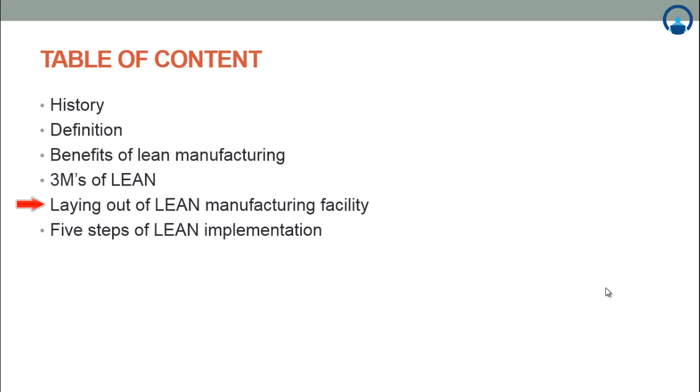Let's start with a brief history of lean manufacturing. Lean manufacturing, or lean production, was first introduced by Womack, Daniel Jones and Daniel Roos in the book The Machine That Changed the World in 1991. The first person to truly integrate the entire production process was Henry Ford. At Highland Park, Michigan in 1913, he married consistently interchangeable parts with standard work and moving conveyance to create what he called flow production. So Henry Ford was the first person to introduce flow production in a manufacturing industry.

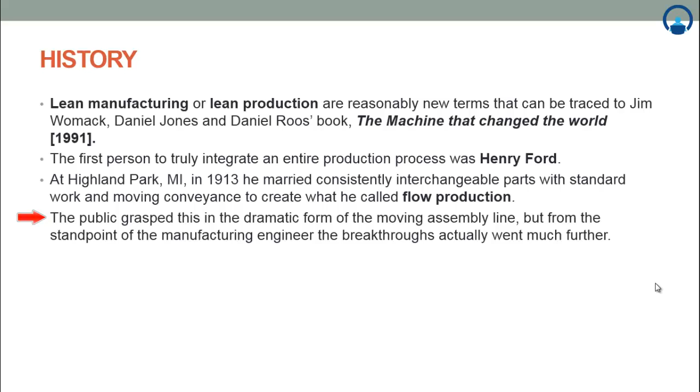The public grasps this dramatic form of moving assembly line, but from the standpoint of an engineer, the breakthrough actually went much further. As Kiichiro Toyoda and Taiichi Ohno and others at Toyota looked at this situation in the 1930s, and more intensely just after World War II, it occurred to them that a series of simple innovations might make it possible to provide both continuity in process flow and a wide variety in product offering. They therefore revisited Ford's original thinking and invented the Toyota Production System, the TPS.

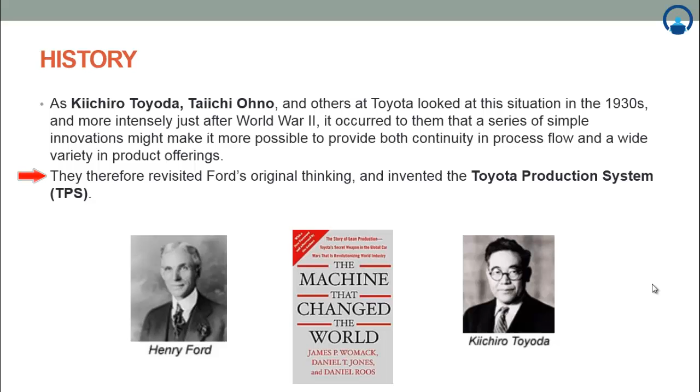So, what is lean manufacturing? Lean manufacturing has been defined in many different ways. One of the definitions given by the MEP Lean Network is: a systematic approach to identifying and eliminating waste through continuous improvement by flowing the product at the pull of the customer in pursuit of perfection.

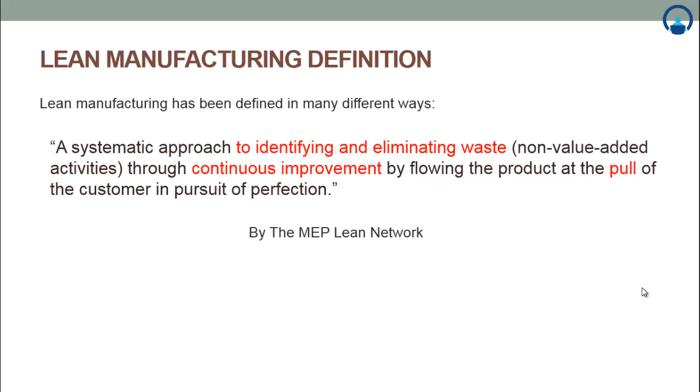I highlighted 3 words: identifying and eliminating waste, which means non-value added activities in the product and process part. The second part I highlighted is continuous improvement, which says that continuous feedback and improvement is needed in the product and process part of a manufacturing industry. The third part I highlighted is the pull part, which defines that customer feedback is important in a lean manufacturing system.

Now, what are the benefits of lean manufacturing? Lean manufacturing delivers an insurmountable competitive advantage over competitors who do not use it effectively. So what are the advantages gained by the industry? The first is lower production cost, directly proportional to higher profit and wages. Indeed, lean manufacturing reduces the production cost and directly increases the profit and wages of a company, as the cost avoidance flows directly to the bottom line of the industry.

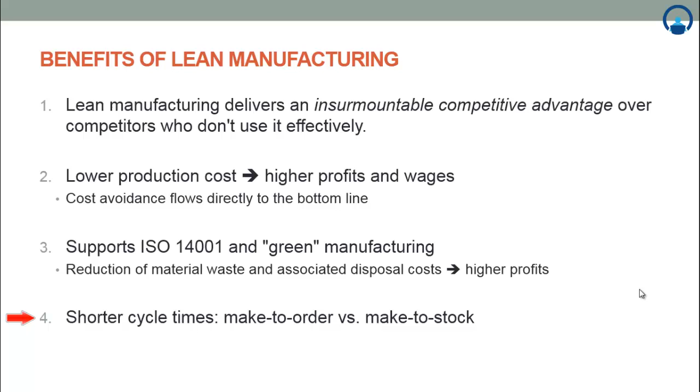Third is that it supports ISO 14001 and green manufacturing. The reduction of material waste and associated disposal cost is directly proportional to higher profits of an industry. Fourth is shorter cycle times, which definitely decreases the cycle time of make-to-order versus make-to-stock.

Now I will cover the 3 M's of a lean manufacturing system. The first M, Muda, the Japanese word for waste. The second M, Mura, the Japanese word for inconsistency. The third M, Muri, the Japanese word for unreasonableness.

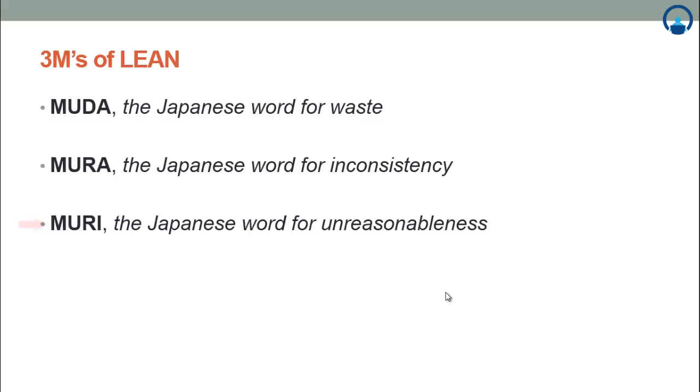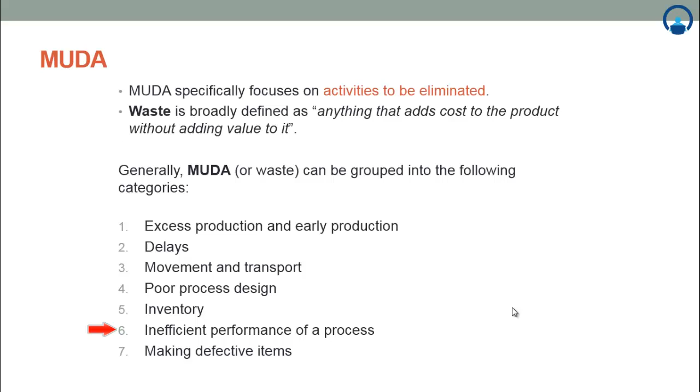Muda specifically focuses on activities to be eliminated. Muda, as defined in Japanese, is waste. Waste is broadly defined as anything that adds cost to the product without adding value to it. Generally, Muda can be grouped into the following categories: excess production, early production, delays, movement and transport, poor process design, inventory, inefficient performance of processes, and making defective items. These are the 7 types of waste, or 7 types of Muda.

The first is correction, repair or rework. Motion: any wasted motion to pick up parts or stack parts, also wasted walking. Overproduction: producing more than is needed before it is needed. Conveyance: wasted effort to transport material, parts or finished goods into or out of storage or between processes. Inventory: maintaining excess inventory of raw materials, parts in process, or finished goods. Processing: doing more work than is necessary. Waiting: any non-work time, waiting for tools, supply parts, etc.

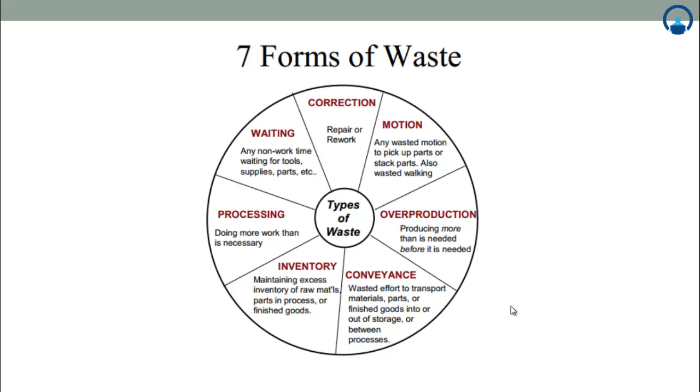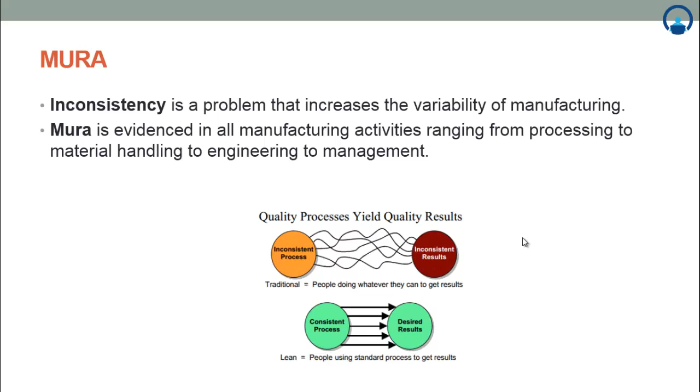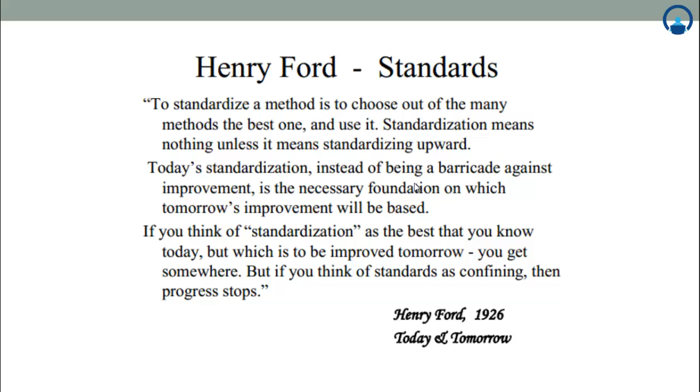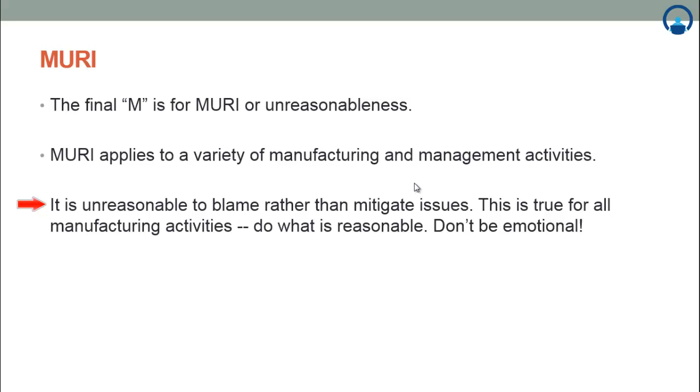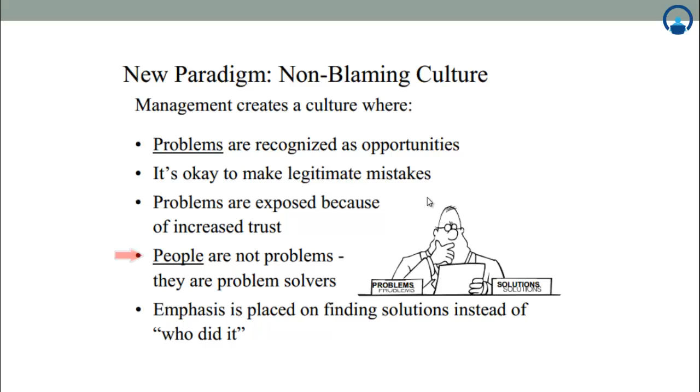This figure shows the new paradigm, a non-blaming culture. Management creates a culture where problems are recognized as opportunities. It's okay to make legitimate mistakes. Problems are exposed because of increased trust. People are not problems, they are problem solvers. Emphasis is placed on finding a solution instead of who did it.

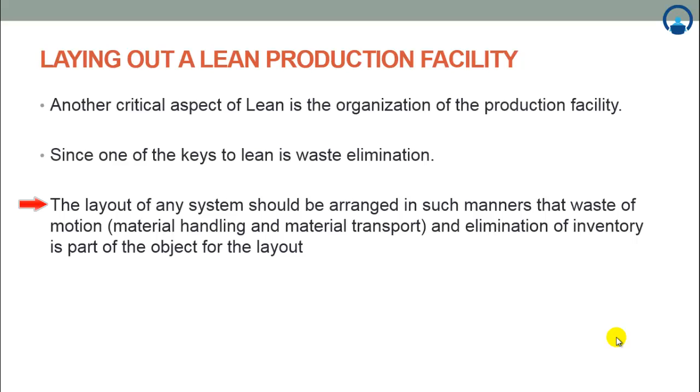Now I cover laying out a lean production facility. I will talk on production facility layout. Another critical aspect of lean is organization of the production facility. Since one of the keys to lean is waste elimination, layout of any system should be arranged in such a manner that waste of motion, that is material handling and material transport, and elimination of inventory is part of the objective for the layout.

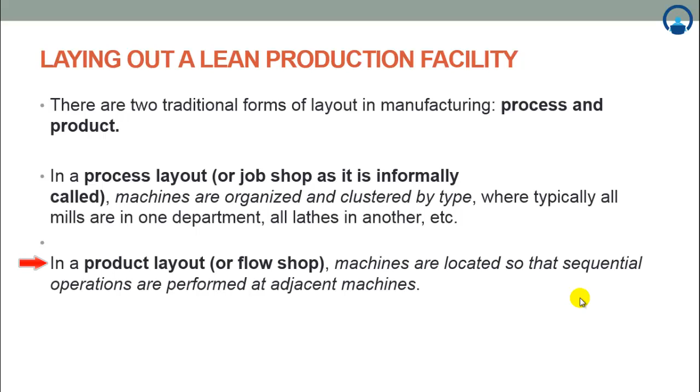There are two traditional forms of layout in manufacturing: process and product. In a process layout, or job shop as it's informally called, machines are organized and clustered by type, where typically all mills are in one department or lathes in another. In a product layout, or flow shop, machines are located so that sequential operations are performed at adjacent machines.

Advantages of a process layout are the flexibility of the system to produce almost any part that fits within the volumetric boundaries of the machine. An in-depth understanding of a specific process can be obtained. Some tooling and fixtures can be shared.

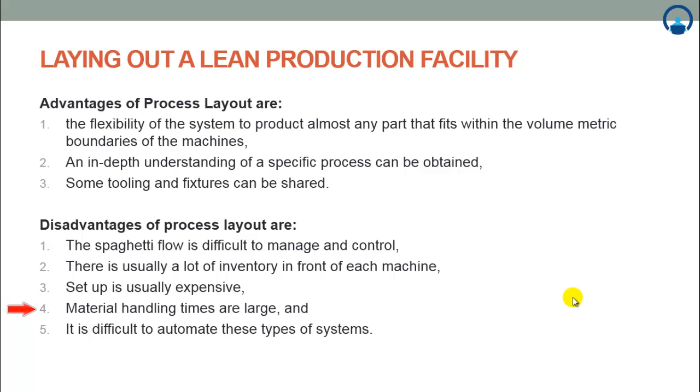Disadvantages of a process layout are spaghetti flow is difficult to manage and control. There is usually a lot of inventory in front of each machine. Setup is usually expensive, material handling times are large, and it is difficult to automate this type of system.

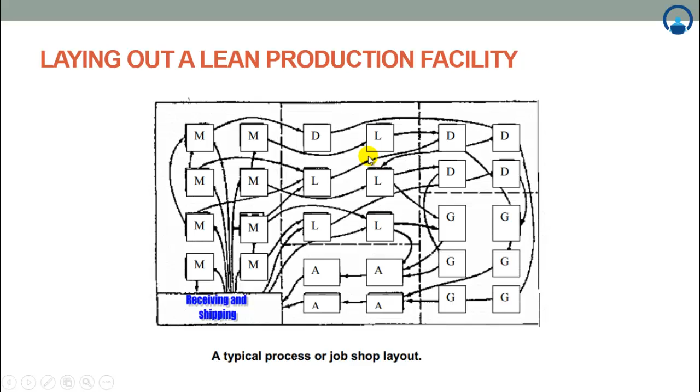Now, advantages of a product layout are large batches can be produced inexpensively, material handling is minimized, in-process material is minimized, it is easy to control this system, and automation is more achievable and justifiable.

Disadvantages of a product layout are they are inflexible in that only one or very few products can be produced on them. Setup time for this system is very large. Duplicate tooling is required to replace worn tooling so that maintenance can be minimized.

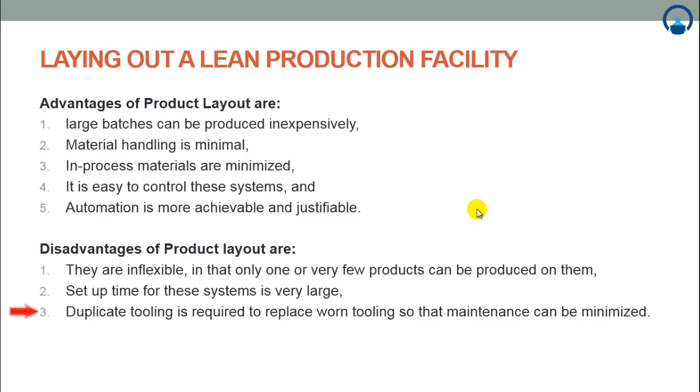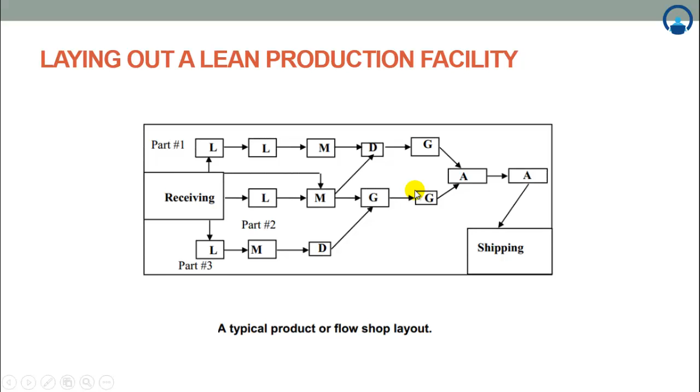This is the layout of a typical product or flow shop layout. Here, the machines are arranged according to the process of a product. As the figure shows: lathe and mills, then drilling machine, grinding and assembly, then assembly and shipping. Raw material is received here at the lathe, then goes to mill, grind, and assemble. So it is designed based on the process sequence for the part or product.

Now there's another layout which is a hybrid of the product and process layout, called cellular layout. Cells are used to make families of parts rather than just one-of-a-kinds or high volume items. Cells are a logical cluster of machines organized to produce a variety of parts requiring the same equipment type, tooling, and fixtures. Cells are intended to provide as many of the benefits of process and product layout as possible.

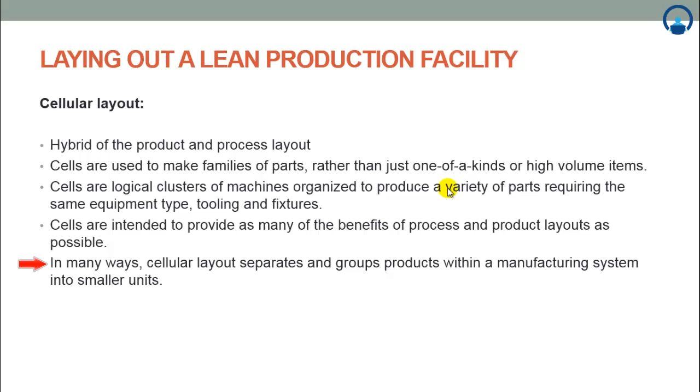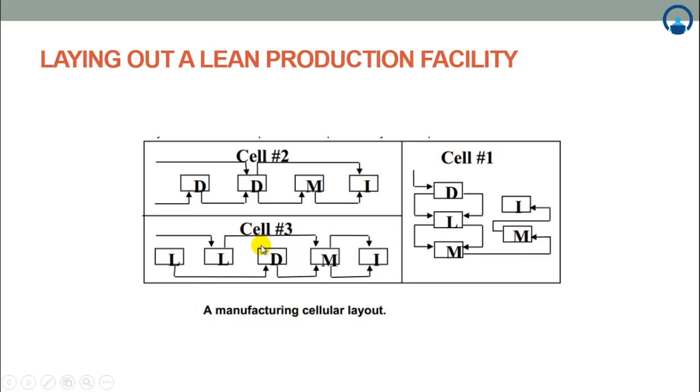In many ways, cellular layout separates and groups products within a manufacturing system into smaller units. As shown in this figure, there are three cells. The first cell covers four machines: drilling, mills; another cell covers drilling, lathe, mills. So it is a hybrid version of product and process layout. Mostly today, industry is using this hybrid layout.